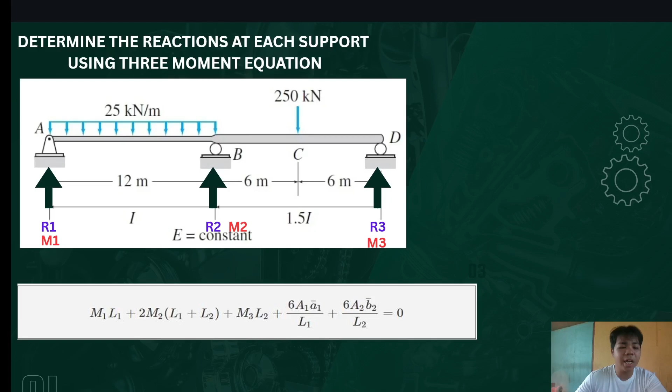Next, we are now going to apply the formula. So, ito na, yung medyo madugong part. So, for some, it would appear intimidating kasi nga ang haba masyado ng formula, di ba? But we can simplify it kung nakinig tayo noon kay Sir Ronel dun sa discussion niya ng 3-moment equation, which denotes that 6 multiplied by area 1 multiplied by a bar 1 over L1, we can call it Batman, di ba? While the remaining 6A2 b bar 2 over L2, we can call it Robin.

So bakit Batman at Robin nga daw? Kasi nga daw, si Batman daw kailangan daw ng kanang kamay. So it is safe to conclude that Batman appears on the left side of what we are trying to determine. Ibig sabihin, Batman lies at the left part of the beam. And Robin lies at the right part of the beam. Okay? So ano pang mapapansin natin dito?

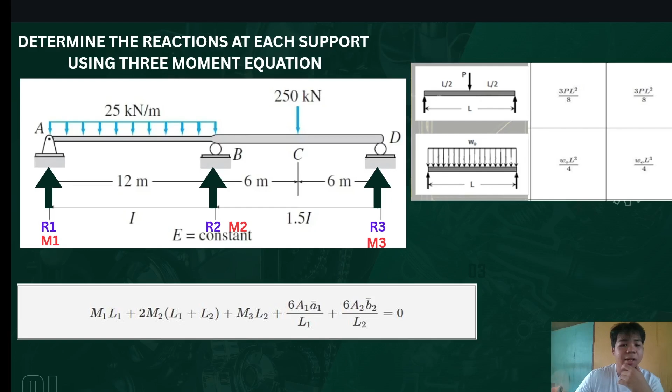Okay, pero let's recapitulate. M1 is equal to 0. So 0 multiplied to L1 or multiplied to 12 will be equal to 0 kaya wala na yan. M3 multiplied by L2 will be 0 kasi nga 0 lang din naman ang M3 since it is a roller. So 0 lang din yan. So, napakasimple na lang, di ba? Parang maning-mani na lang yan. So, next na gagawin natin is to determine the value of Batman and Robin through the given formula from the table of equations. Okay?

Batman will be equal to wL cubed over 4, which would give us 25 multiplied by 12 cubed over 4, which is equal to 10,800 over I. And I is equal to 1, so ibig sabihin 10,800 over 1 lang yan. So 10,800 lang. And for Robin, or for the right side of the beam, 3PL squared over 8, which would give us 3 multiplied by 250 times 12 squared over 8. That would give us 13,500 over 1.5I.

So simplifying this one, it would give us 9,000 na makikita nyo na lang mamaya sa direct substitution nito sa formula. Next, ano pa ang need natin gawin? Wala na. So what we should do now is to substitute every value into the given formula para makuha natin ang value ng M2.

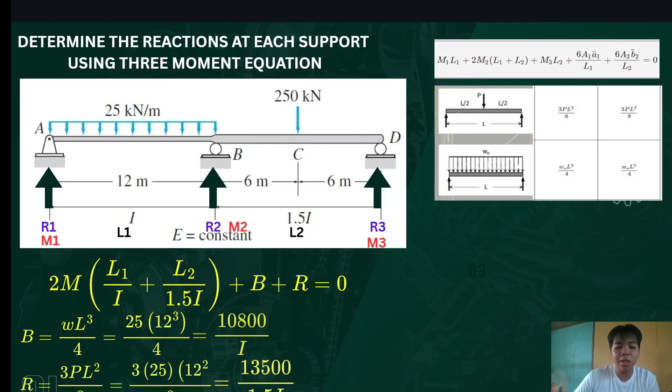So 2M2 multiplied by (12 over 1 plus 12 over 1.5) plus 10,800 plus 9,000 is equal to 0. So, simplifying our equation, we will be able to get the value of M2, that is 495 kilonewton meters. Okay? So, simple na lang.

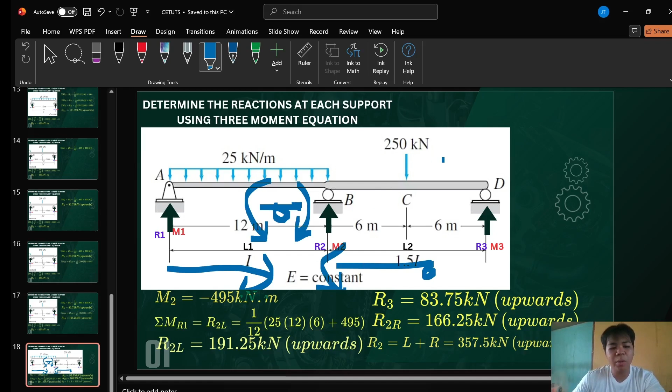So, since alam na natin yung M2 natin, what's left for us to do is to determine the reactions of R1, R2, and R3. So, madali na lang. Moment na lang, summation forces vertical na lang. Then wala na, nakuha na natin lahat.

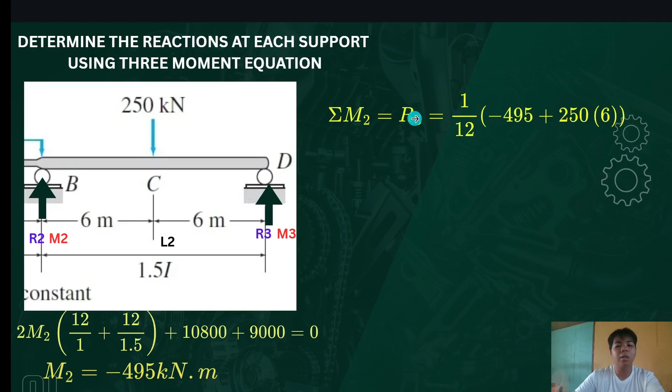So, magmo-moment ako sa R3 naman. Summation moment at R3, that would give us R2 right, which would be equal to 1 over 12 of 250 multiplied by 6 plus 495. So, R2 right would be 166.25 kilonewton upwards. So, di ba sobrang dali na lang after mo makuha yung M2.

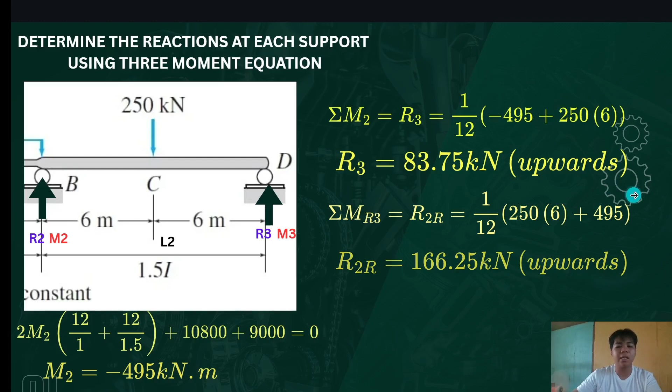Then next, let's finalize our answers. M2, negative 495 kilonewton meters. R1, 108.75 kilonewton upwards. R3, 83.75 kilonewton upwards. R2 would be the sum of left and right reactions considering that we cut the beam, which would give us 357.5 kilonewton upwards. Okay, so sana na-grasp ninyo yung concept ng three-moment equation with varying moment of inertia. Kasi yun po talaga ang highlight nitong problem na ito.